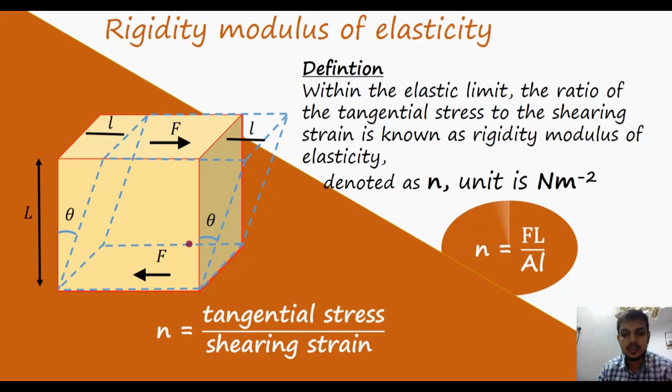To find that, I have taken this cubical box and named it A, B, C, D on the top surface corners, and I applied a force in this direction. Then the angle theta is sheared. That is, the strain is theta, and the length earlier was A, that is now shifted to A dash. So A and A dash, that is equal to now it is L. The length is L, and this theta is very small.

Comparatively, the value is smaller because some strong materials will not deflect much. So let me keep a very small value of theta, then it can be approximated to tan theta. The small value of tan theta is equal to theta.

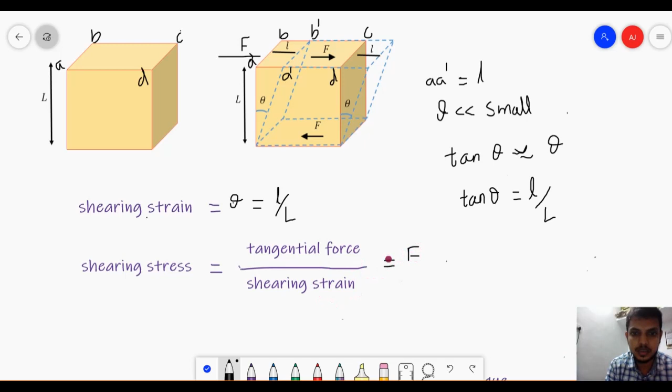So tan theta is the opposite side divided by the adjacent side. You can see here, this is the length and this is the angle, so this is opposite side, this is adjacent side. Simple trigonometry says that tan theta equals L divided by L. So this is the strain occurred because of this tangential force. Now the tangential force is F, and we need to find what is the tangential.

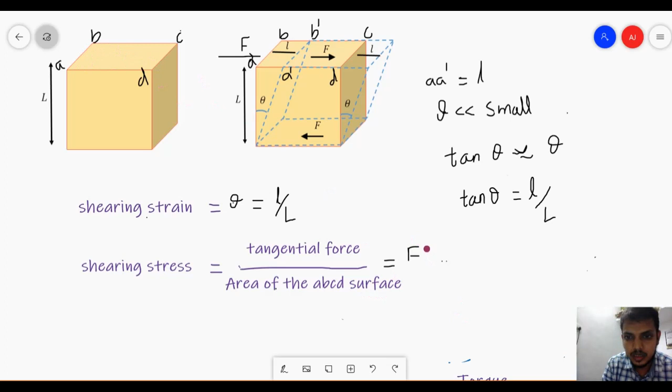Mistake happened here. It is the area of the ABCD surface, that particular surface. Then force is F. That area I will write as A.

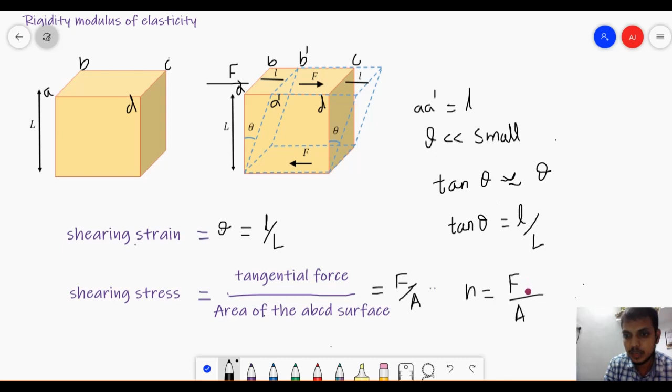Now this N can be written as the rigidity modulus, which is tangential stress, that is force divided by area. So I will keep it in the denominator, and then strain. Whatever is in the denominator will come to the numerator. Then capital L will come here, and the small l will go here. So this is actually our rigidity modulus formula.

So the unit is Newton per meter square, because strain doesn't have any units, only the force and the area will have units. So stress has units, the strain doesn't have any units. This is the idea we got from the rigidity modulus of elasticity.

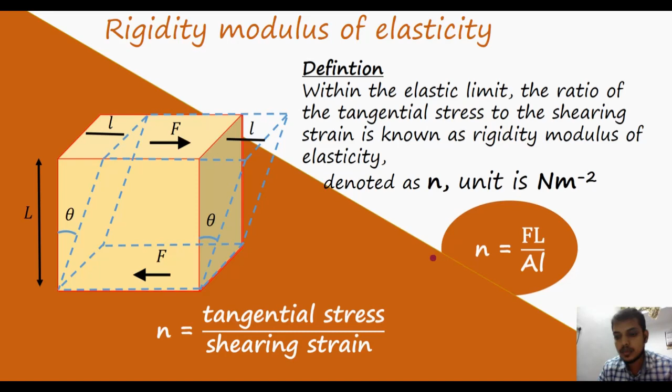Then now it is a couple. Couple means I have 2 points, 2 edges, and equal and opposite forces acting on that. Then it makes a rotation. This kind of structure is actually called a couple. It is not the distance between D, it is measured with the perpendicular direction distance between these 2 points and the force. That is actually called a couple.

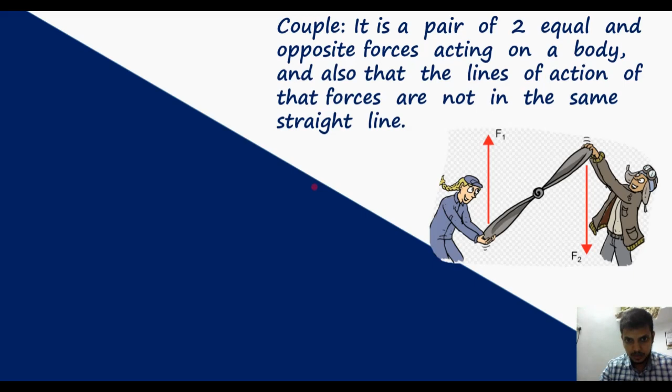Similarly, there is a moment of force and the torque. Both are almost similar, this couple, moment of force and torque. There is no difference, which we can see in this video.

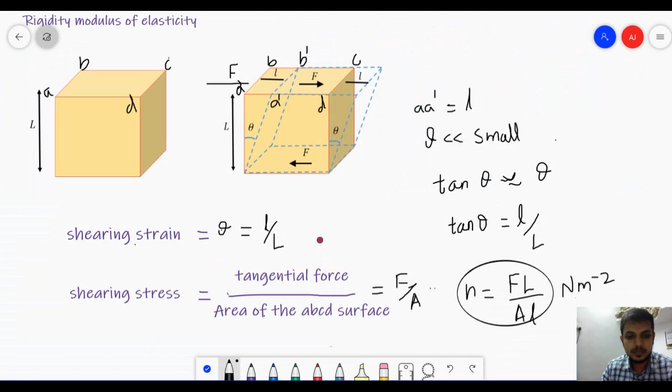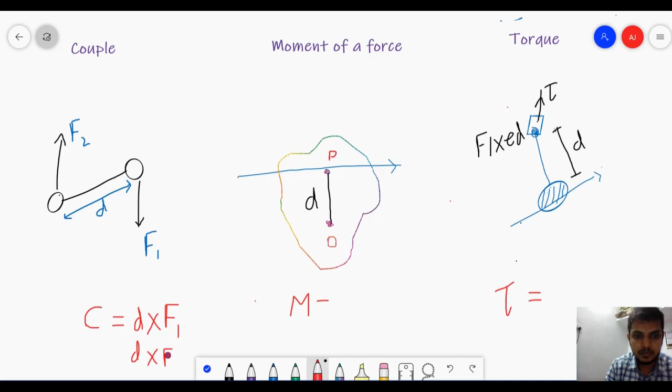I think it's going very to the border, so let me shift it slightly above.

Now this is moment of force. Moment of force acting on point O is measured with the force acting on the actual line of force at point P. So this is the perpendicular distance between these two, that is d, and the force vector. So this cross product will give the moment of force.

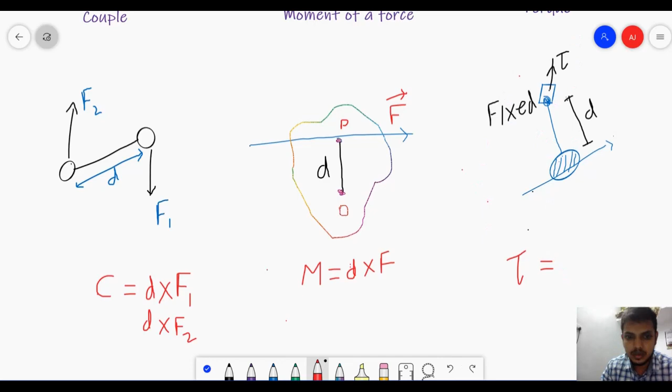And the torque, this one is torque. Like I fixed one particular place, and the ball is moving around, tied by the wire, and the distance is d. So the perpendicular distance between the line of point of contact and this gives the torque value, that is the same, d cross f.

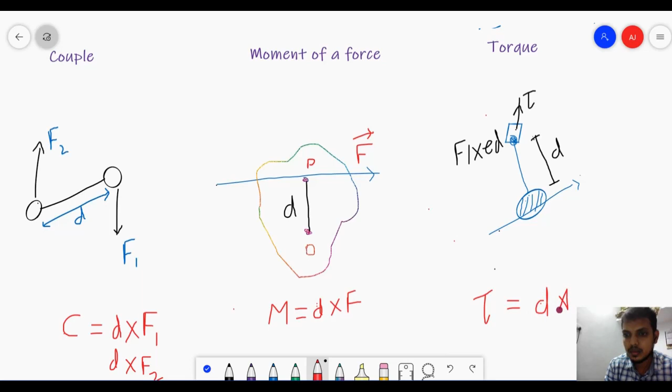The basic idea behind this. So now we go to next.

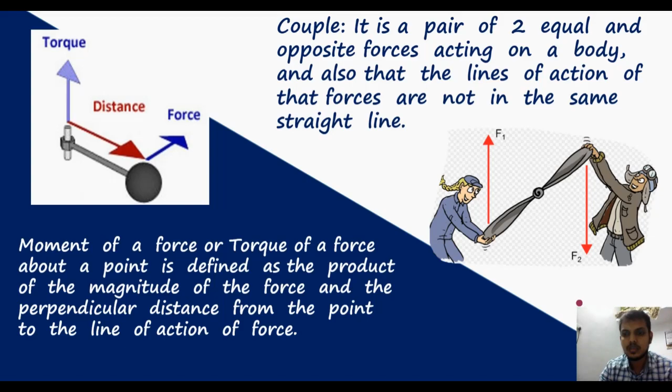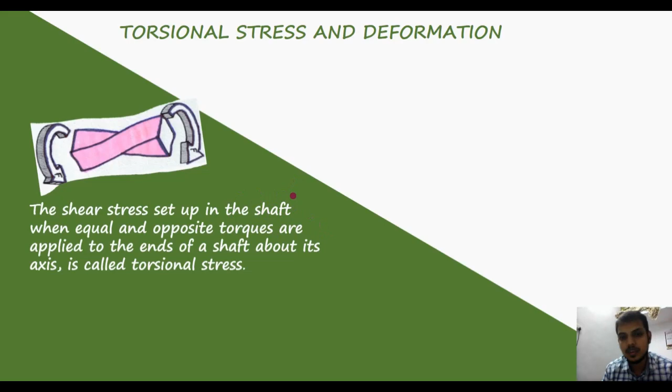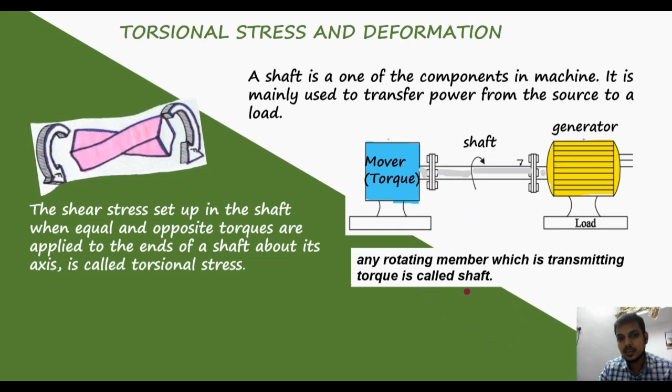So this is one particular main equipment based on the torsional effect, that is the shaft. Shaft means when vehicles use it to generate energy, it is like this. The shaft is one of the machine components which mainly transfers the torque from the source to the generator. So actually any rotating member transmitting torque is called a shaft. One example is in vehicles, all vehicles use it definitely.

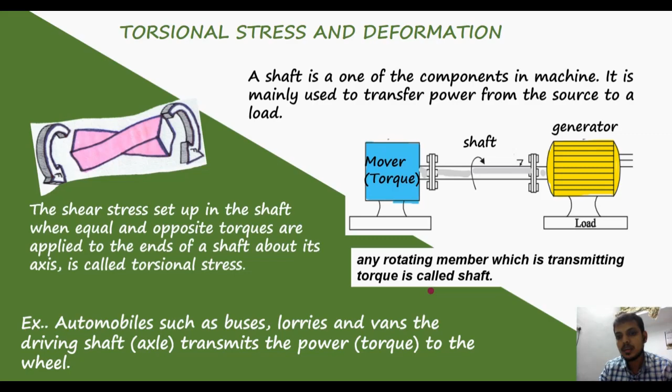So we have taken a thin cylindrical wire. Here it's some bulk structure, but I have to show it clearly, that's why I kept a bigger size radius here. We'll consider this a cylindrical wire, one edge is fixed, the downside is going to rotate, and opposite forces are applied, this external twist couple acting on the wire.

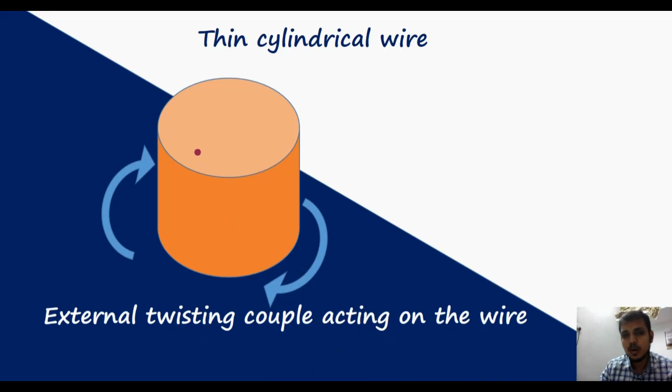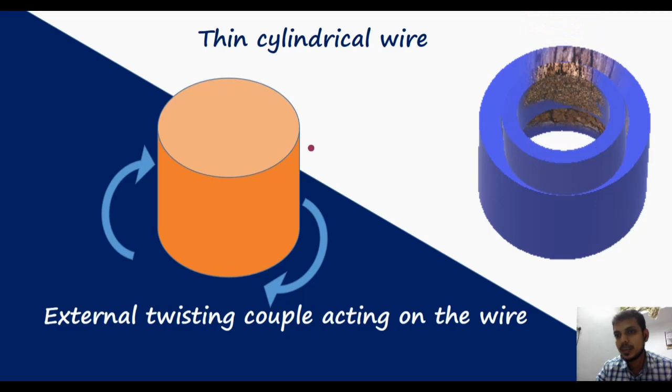The basic idea behind this, I need to find how much it is twisted. For that I cannot take the complete system, so I am going to split it, like how each layer looks, splitting it into thin cylindrical layers completely.

So in this particular structure, the top surface is fixed and the down surface is given torque in the opposite direction, and the cross sectional area is shown here. The complete derivation I will do on the other page. Let's see now.

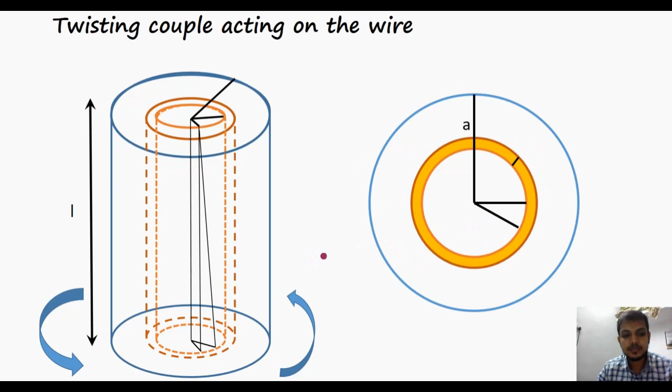This is like this. I give this, the radius of the wire is a, and I have taken one particular layer of the cylinder, that is from the distance from the origin is x, and that layer thickness is dx. Here top shearing strain, that is twisting angle at free end, that is theta.

This is the angle, and that is shearing angle, that is phi, and at the free end it is theta. How much is theta? Now I have to calculate BC in two values. So BC is either, that is like a triangle, and the distance is x.

So you see two parallel lines, one is PQ and one is AB. The parallel lines downside, it is shifted from B to C. A is still same, and only BC shifted. So now I have two triangles, QBC.

From QBC the value of BC, the length of BC is x theta. That x is this distance, and this theta angle is written here, and the ABC, that is from triangle ABC.

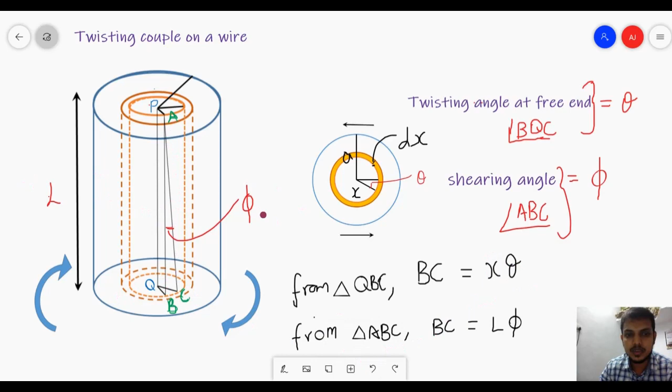I have the BC value, that is length. Because the phi value is very small, BC equals L into phi.

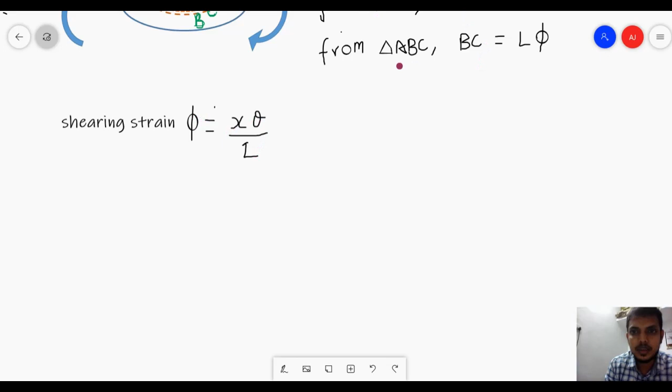To calculate further, BC I have written that phi equals x theta by L. Simply I have equated these two BC values, that L phi equals x theta.

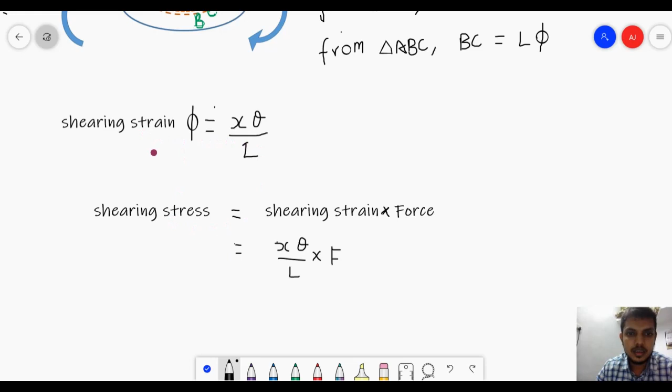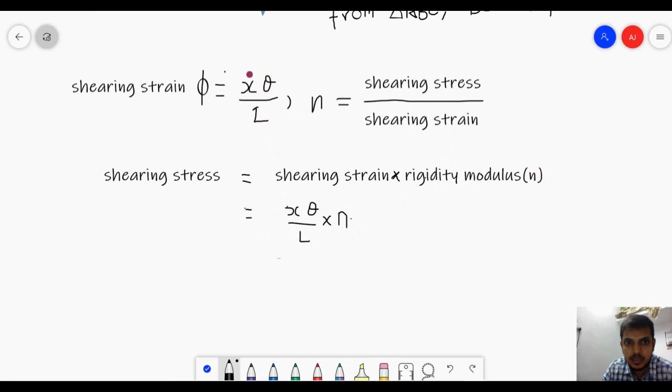So now I have to find what is the shearing stress. Shearing stress can be written in terms of shearing strain into rigidity modulus N. Then I have written strain value, x theta divided by L, into the N value, rigidity modulus. You can see that the stress has been found.

Now the force, that is shearing stress into the area on which force acts, that is equal to the area x. Pi r square is the area formula for the circle. Here x plus dx is the outer circle of the cylinder.

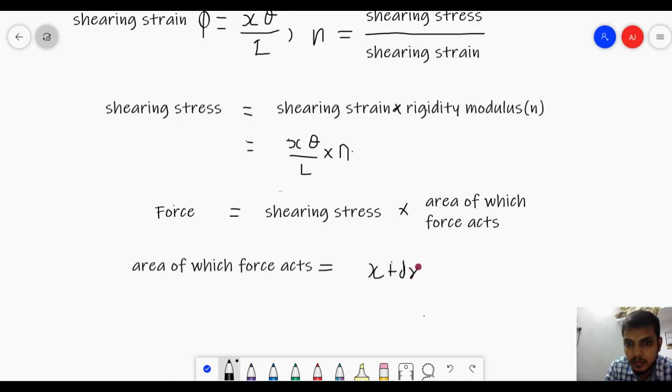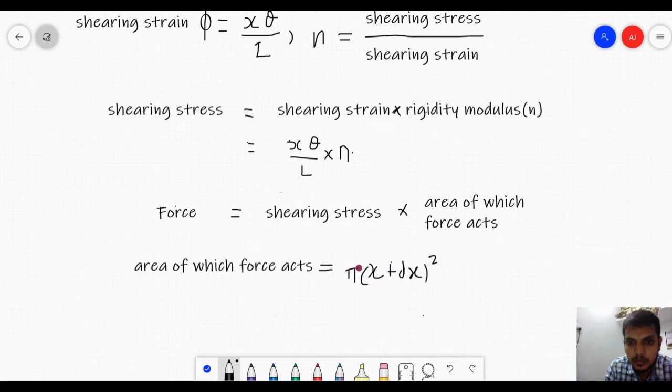Then I can extend this x plus dx to be x square plus 2x dx plus dx square, minus this x square. So I have taken pi outside. Then this x square minus x square will cancel. Then this dx is a very small value, so its square will be very small, and I can neglect that. Then the area on which force acts is 2 pi x dx.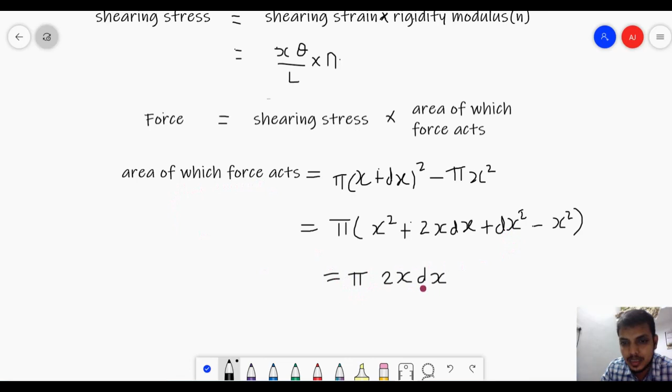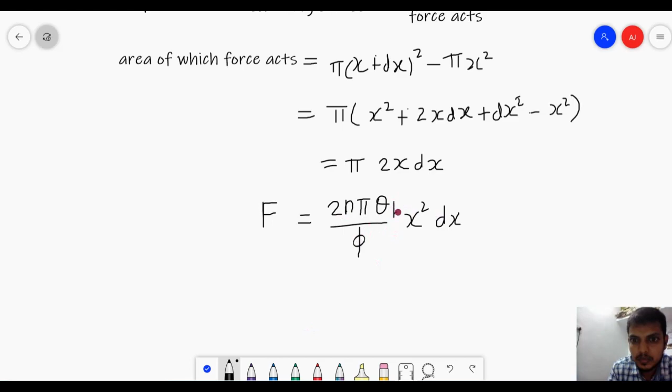Then this force can be written as 2N pi. By adding that shearing stress, the value is N pi theta by L. Sorry, small mistake, that is 2N pi theta divided by L. That x will be added. One more x is there, so x square dx.

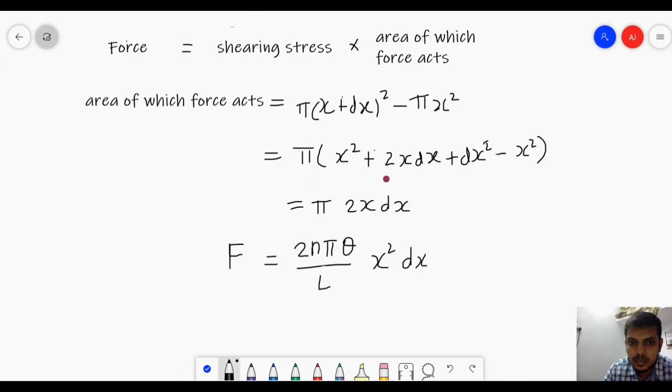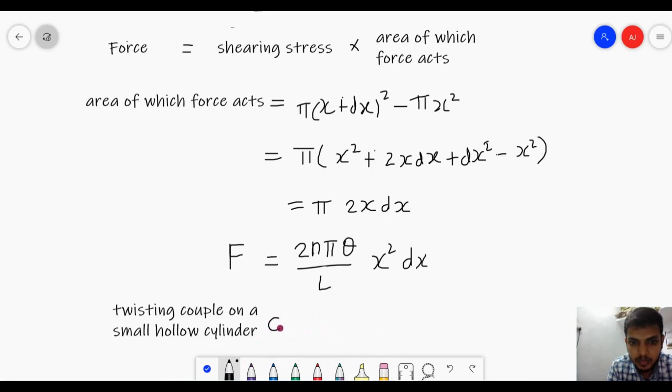Now we have to find the torque. Small cylinder coupled to twisting couple, the C value is, we can write it as, the force and the distance between the origin to the cylinder end, perpendicular distance is x. So that is the twisting couple of that particular single cylinder which we took as dx length. That one is like 2 pi N theta by L, x cube dx.

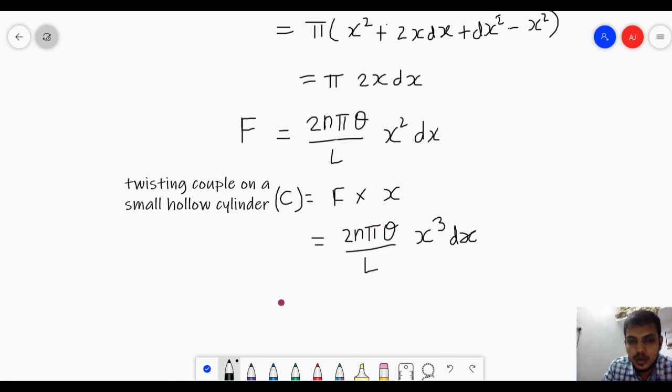So now we need to integrate over all. I have to integrate over the complete cylinder, radius A. Then if I do that integration from 0 to A, the integral limit only varies for the x value. Other things are constant, so I can take them outside.

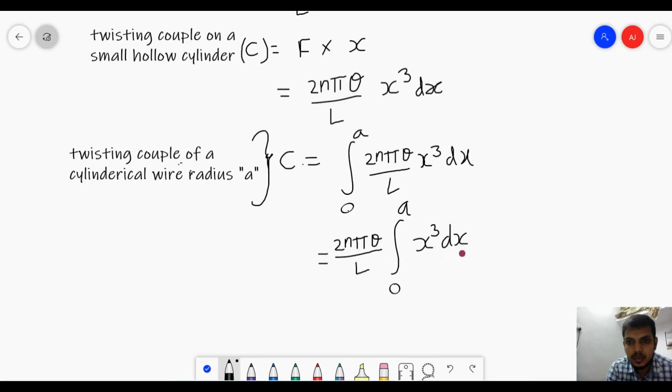That 2N pi theta L and x cube dx will not be a matter for us. Then this integration will give the value as x power 4 divided by 4, the limits will be 0 to a. Then if I apply that, I will get a power 4 divided by 4, the 2 and 4 will cancel. Then N pi theta, a power 4 divided by 2L.

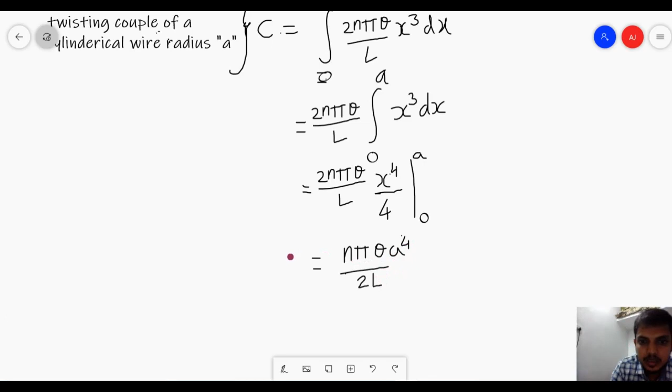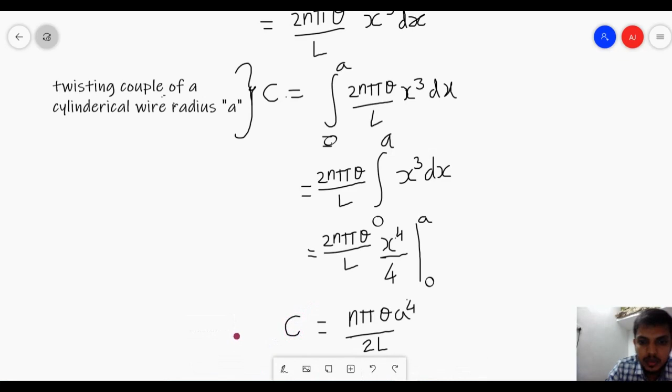That is the coupling rigidity constant we got. So if per unit twist the theta value is 1, if the theta value is equal to 1 per 1 degree unit twist, then

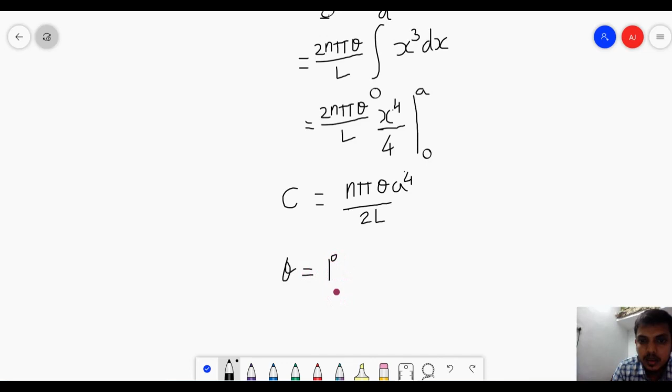C can be written as N pi a power 4 divided by 2L. That is the final twisting couple we got for our cylindrical wire. So with this I will stop it here.